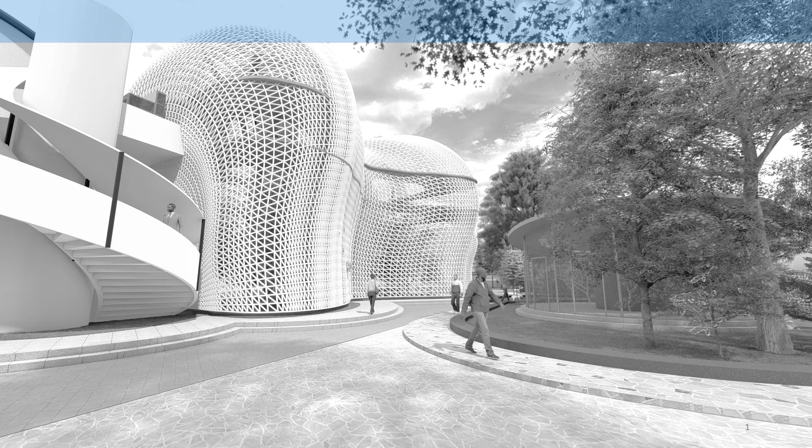Beginning with the introduction: why this topic? The process of urbanization is continuously depleting our cities of biodiversity. Humans consciously care about only humans and their foremost surroundings, neglecting a major part, that is, nature and animals. Hence, I feel there is a need for such a center which would give them five freedoms.

1. Freedom from hunger and thirst. 2. Freedom from discomfort. 3. Freedom from pain. 4. Freedom to express. 5. Freedom from fear and distress.

This center will be covering animal assisted activities, animal assisted happiness, and animal assisted therapy. The aim of the Welfare Center is to provide a roof, medical help to animals and birds, and to create a human animal bond. Biophilic architecture.

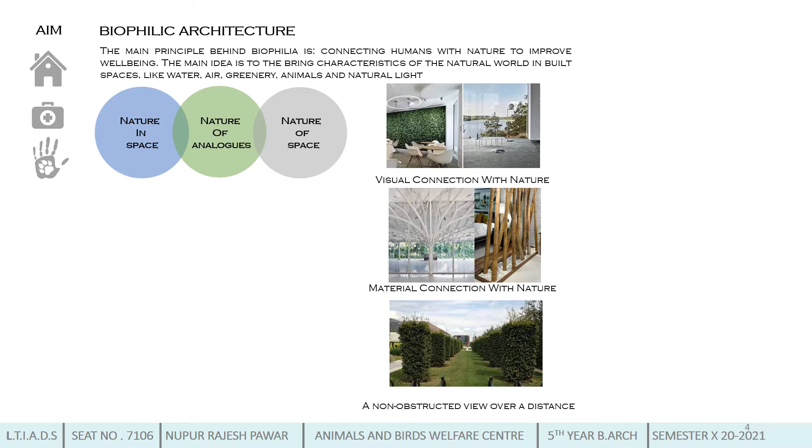The main principle behind biophilic architecture is connecting with nature to improve well being. I have tried to portray this in my center planning. Nature in space, nature of analogs, and nature of space should be linked together for creating biophilic architecture. The main aim is to increase the visual connection with nature, material connection with nature, and providing a non-obstructed view over a distance. Passive cooling techniques have been used by providing courtyards.

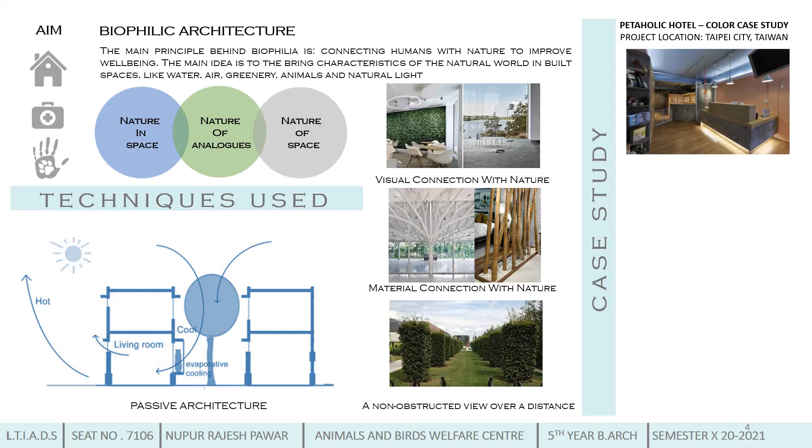Moving over to case studies. A petaholic hotel situated in Taiwan informs us about colors suitable for animal health. Next is People for Animals, which tells about materials. And the third is Palm Springs in US, California, which gives information about open versus built percentages of land.

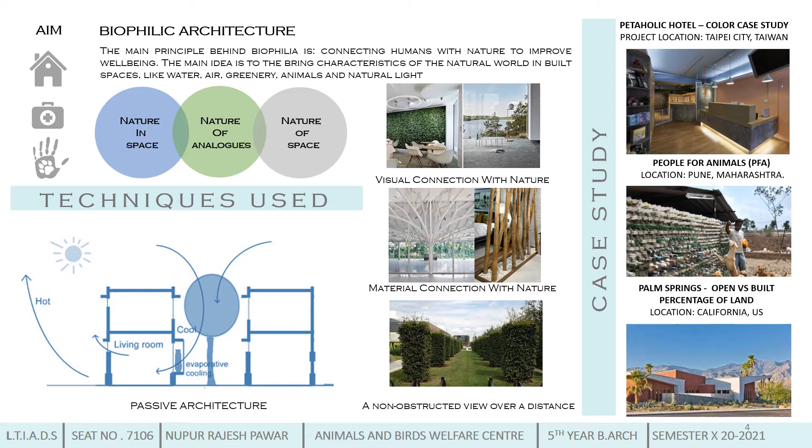Moving further on species of animals and birds that the center would be dealing with. As you can see, these are the various species of dogs, cats, and parrots of Indian and non-Indian breeds as well.

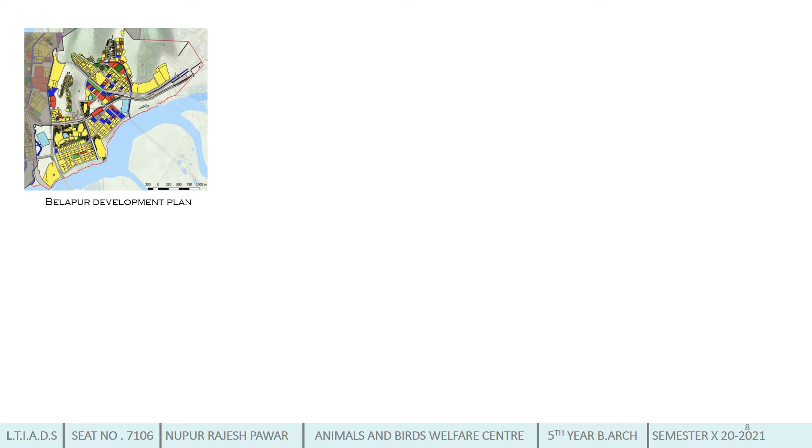Moving to the site study, my site lies in Belapur, a node of Navi Mumbai. The DP of Belapur is more towards residential sectors, and to be precise, it lies next to the Apollo Hospital. Belapur is well connected by two main roads. The climate of Belapur is mainly tropical.

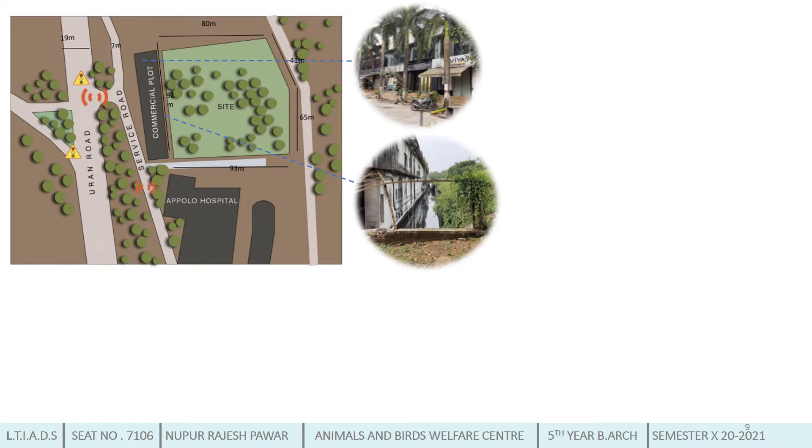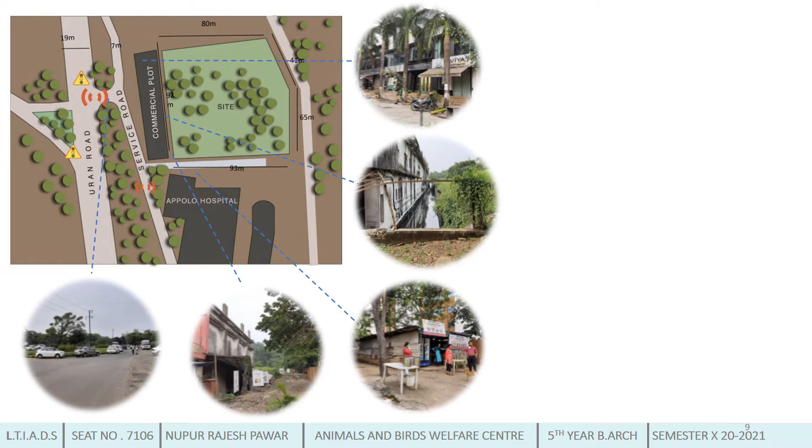The area of the site is 2.7 acres, and it is behind a commercial plot with a refreshment corner and a 4-meter wide Kacha road. Access to the site is from a 7-meter service road connected to the 19-meter wide main Uran road. The keywords of SWOT analysis are thick vegetation, a commercial plot as a buffer, hierarchy of roads, and minimal sunlight from the south.

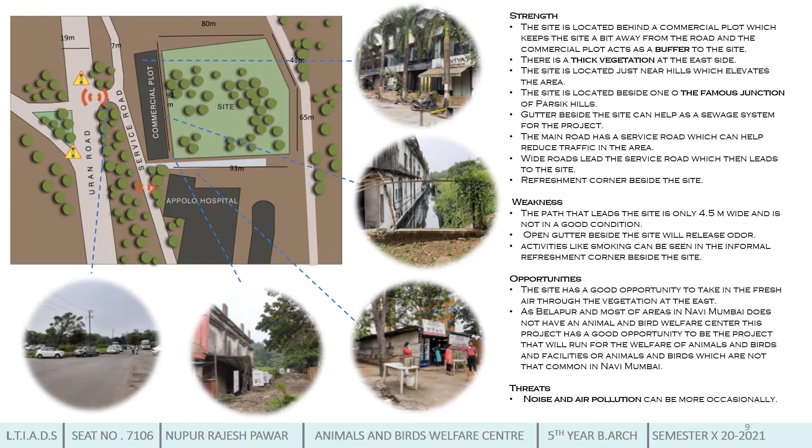Before beginning with zoning and concept, let me tell you that this center will be taking in dogs, cats, and parrots only, because these are the ones who are mostly abandoned and looked for when one wants a pet.

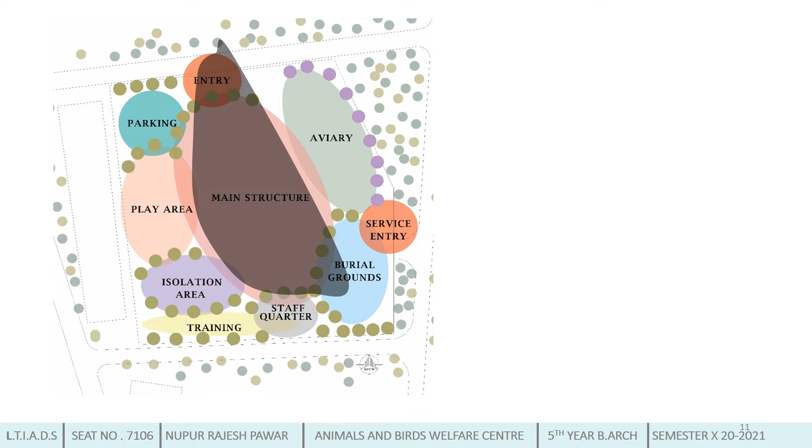Moving further to zoning and concept. The entry to the center is in between the main center and aviary so as to attract and create more awareness towards Psittacidae family, which is the parrot family. The main structure and the aviary are the two parts of the center, which resemble the two hemispheres of the human brain.

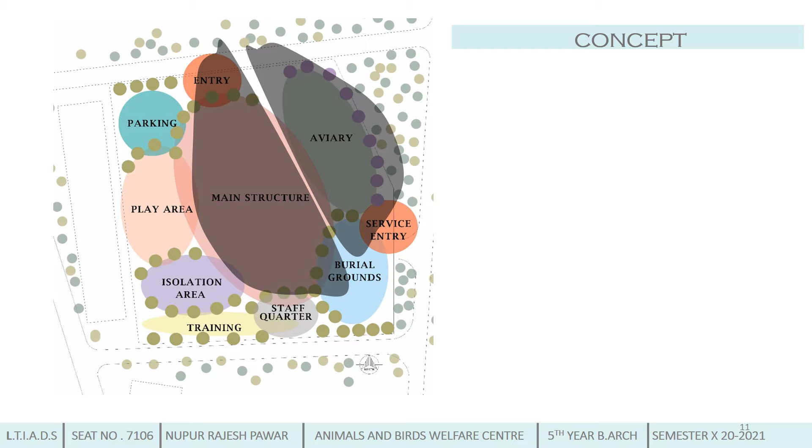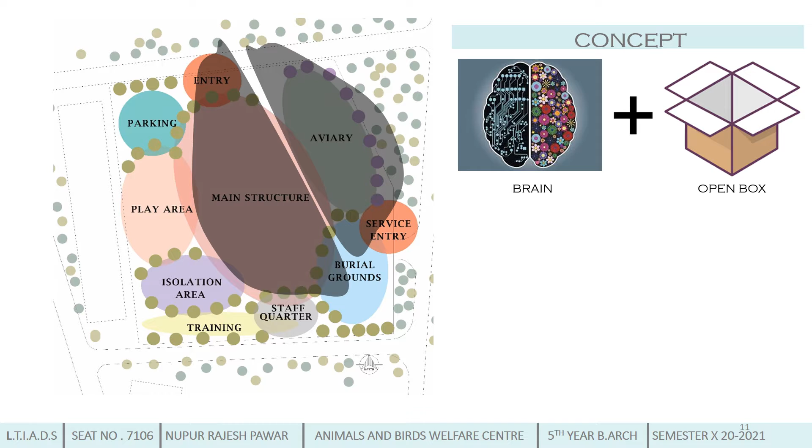The main structure, like the left hemisphere of the brain, is planned more technically, simple and apt for animals, whereas the aviary, which resembles the right hemisphere, is played with forms, as the right hemisphere is about creativity. In addition to this concept, I have tried to incorporate the open box concept, that is, openness in an enclosed space. The overall concept of the center is all about the phrase form follows function.

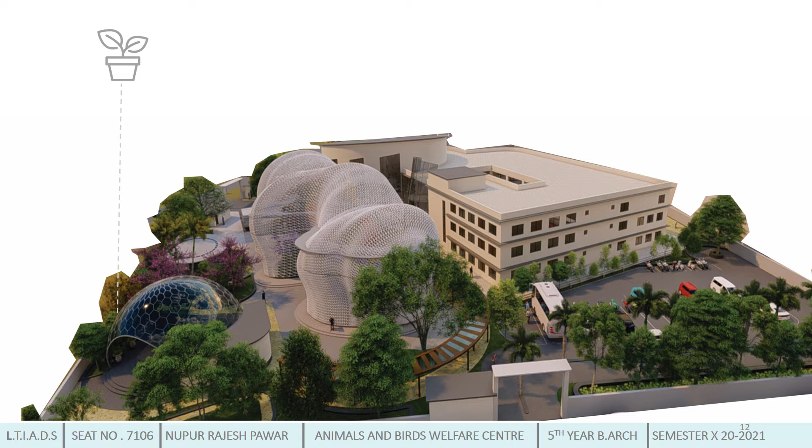The center includes a nursery, a wild bird cage area, a burial ground, an aviary, staff quarters, cafeteria, animal gym, kennels and catteries, isolation area, and a parking lot.

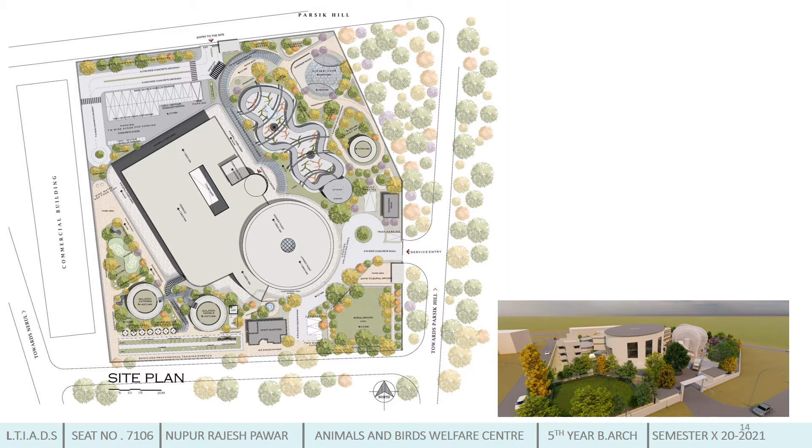Coming to the planning: site plan. The entry of the center is from the north and the service entry is on the east.

All the predominant winds flowing towards the site from the west are pretty much blocked by the commercial building, and hence, to purify the air, an air purification plantation stretch has been provided.

A nursery with species of both indoor and outdoor plants which are safe for animals and birds is planned. A run area for dogs and cats is also provided.

The bird cage area would be caging injured wild birds, freed after the medical treatment. There is also a dog training area provided.

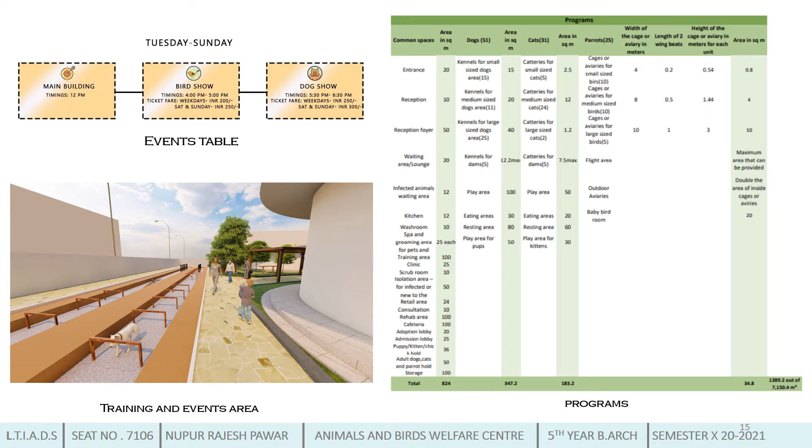I have prepared a chart showing the events in the center. This table shows the various crucial programs necessary for the welfare center.

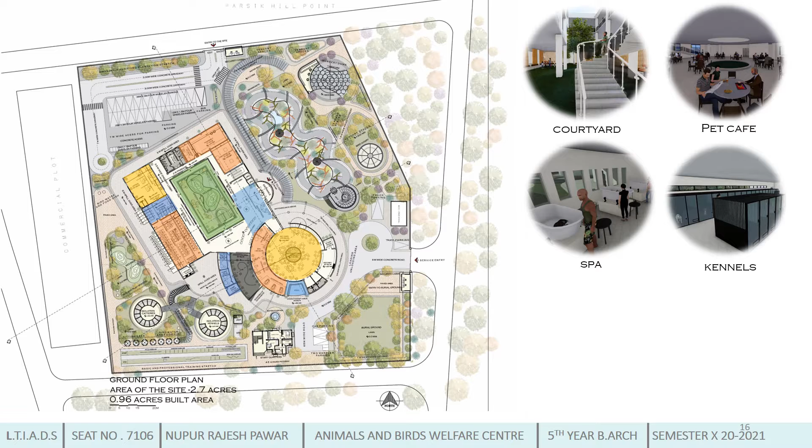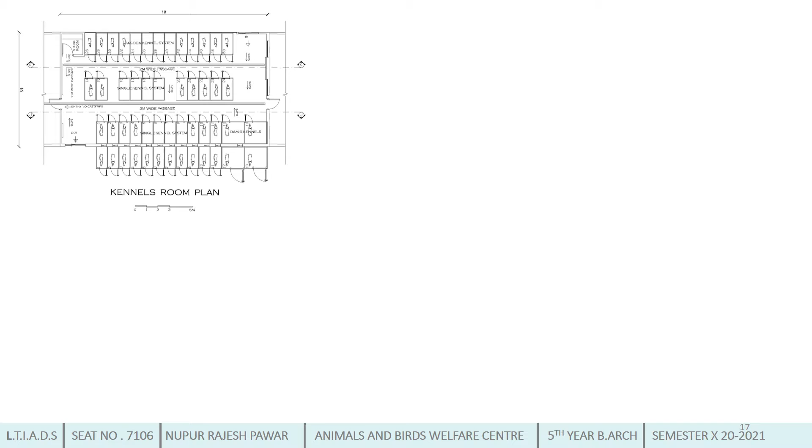Coming up is a blown up plan and section for kennels. It includes single and pagoda kennel systems for large size and small size dogs respectively. This is a typical arrangement of kennel.

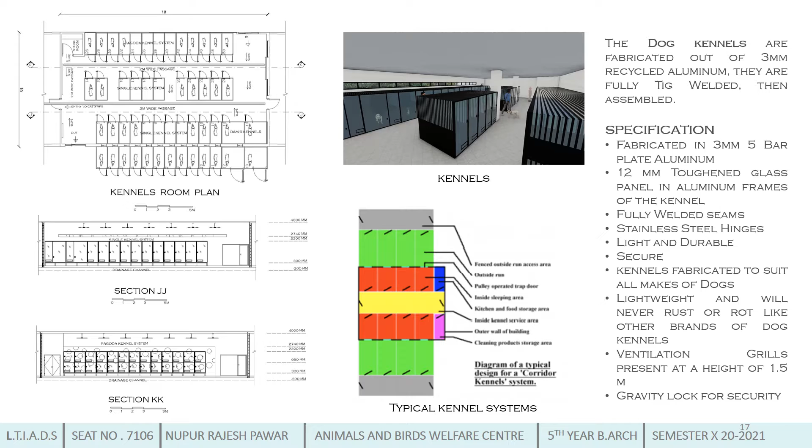These are the plans, sections and elevations of single and pagoda kennel systems. A wider kennel for dams, that is mother dogs along with their pups, is provided.

These are plans, sections and elevations of arrangement of catteries and single units of catteries.

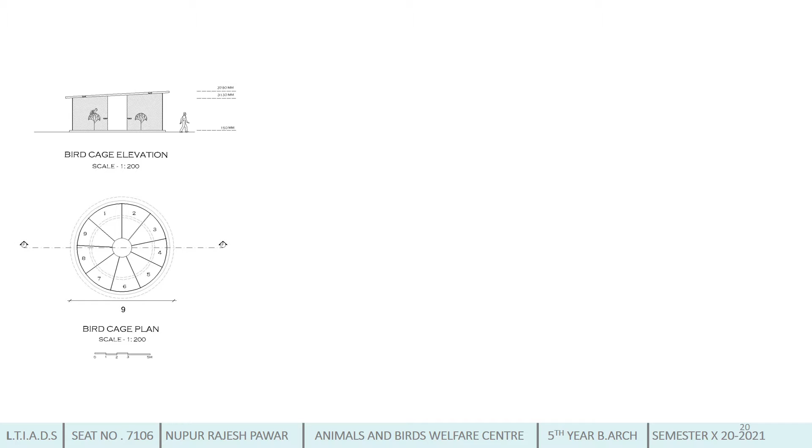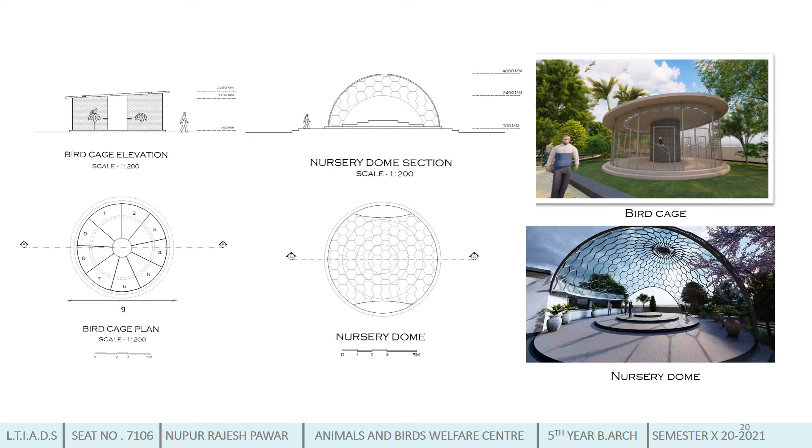Plan and elevation of a bird cage, which is made up of stainless steel mesh, and a plan and section of the nursery dome, which is made up of polycarbonate sheets, are also provided. These are the plan and section of isolation areas provided for dogs and cats.

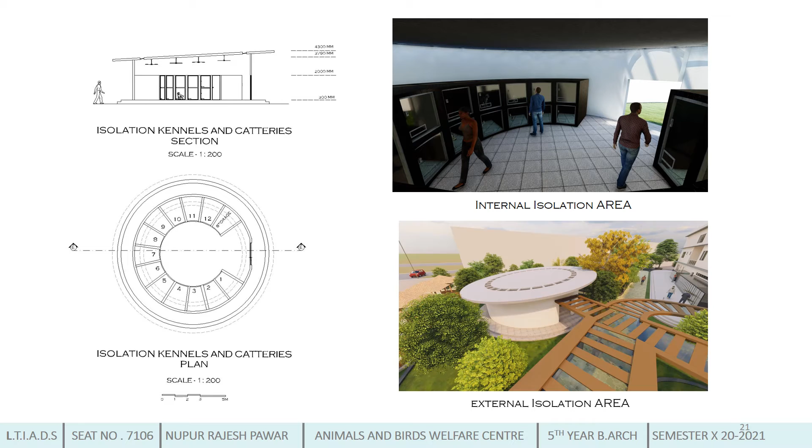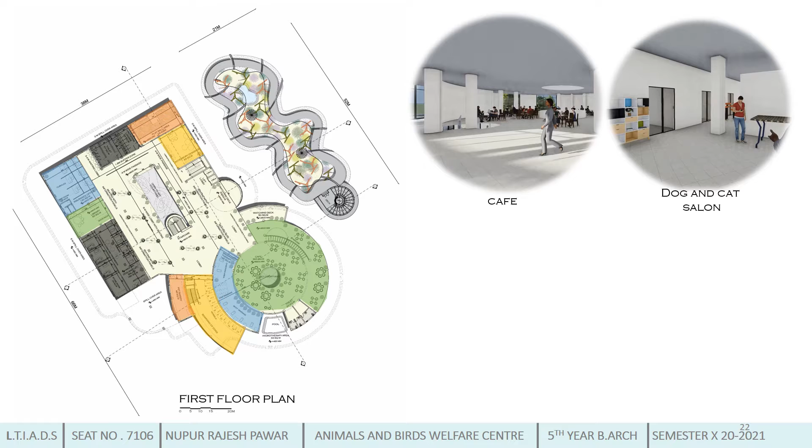Going further to the first floor plan: a normal cafe, a massage therapy area, dog boarding area, bakery for pets, dog and cat salon where fur dyeing and nail trimming will be done, a small library, an office, toilet block, play area, accessory design area, bird watching decks, and a huge lobby which covers the first floor.

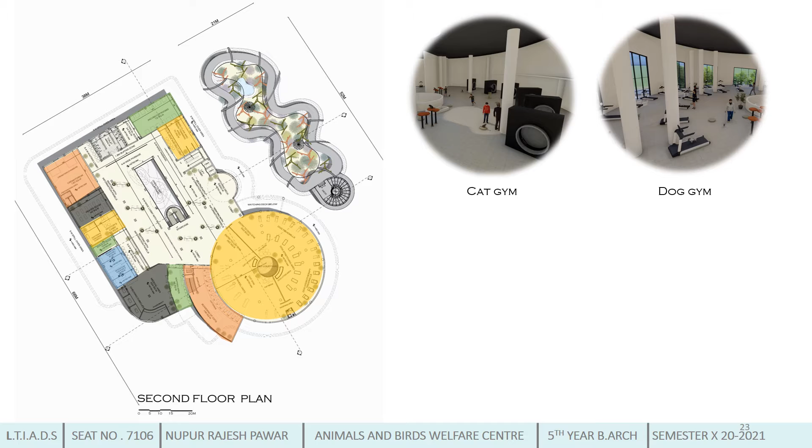The second floor consists of a cat and dog gym, cat boarding, a waiting area in the medical block, checking cubicles, operation theatres, scrub up rooms, and a doctor's room. Moreover, a crematorium with a prayer room, incubator room, bird claw and beak trimming area, and again a huge lobby which covers the central part of the plan.

These are some views from the second floor plan. All the rooms are planned with cross ventilation and enough sunlight, and a central lobby with courtyard which acts as a passive cooling technique of architecture.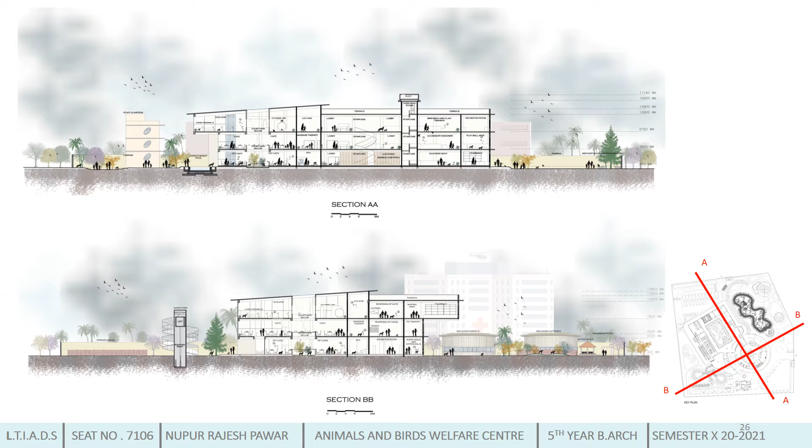Moving further to elevations. The northeast elevation is the front facade of the structure and the southwest elevation is the rear side of the structure. Wall decals have been painted all over for a fun touch to the structure.

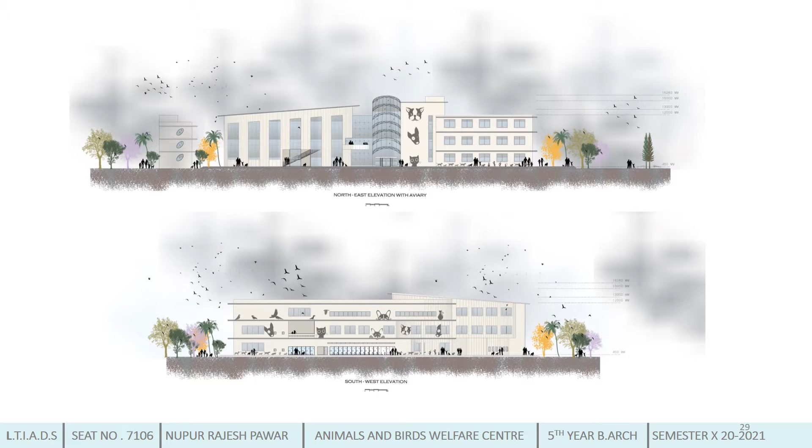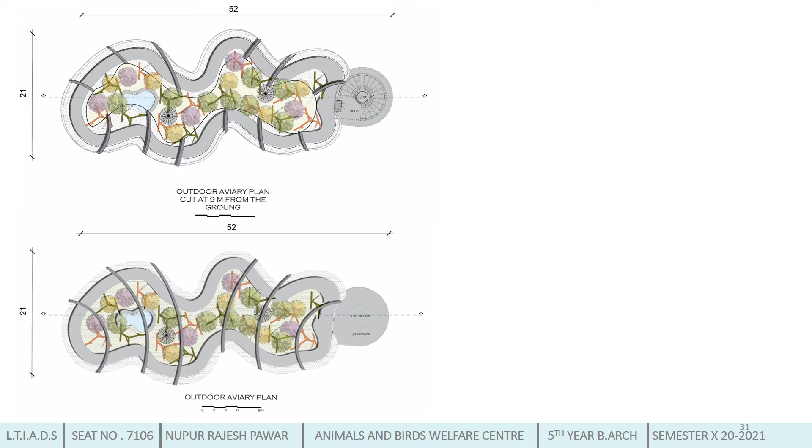Coming to the aviary. These are plans of aviaries and the above plan is cut at 9-meter height from the ground. These are the internal as well as external views of the aviary.

The aviary has a spiral staircase, a lift for handicapped, and a bridge which runs along the periphery of the aviary. The form has been played with, and the tree-like steel columns with artificial cavity nests bring in a natural touch to the aviary. The main mesh is made up of stainless steel.

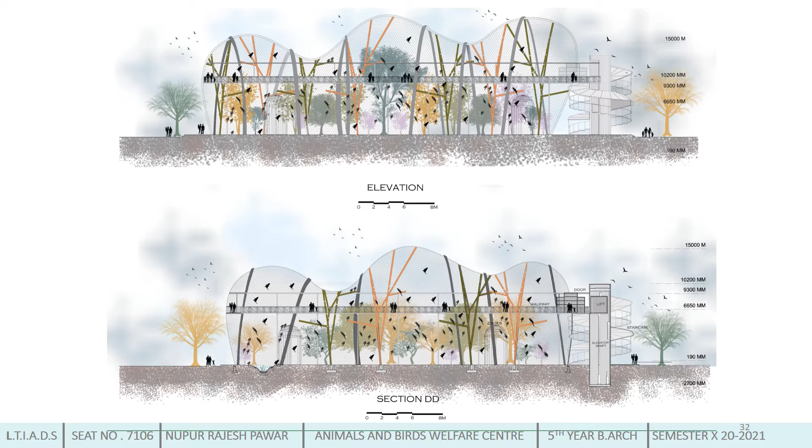According to the study of species of parrots which are mostly sold and adopted in Mumbai and Navi Mumbai, these are conures, lorikeets, grey parrots, and macaws.

Moving further to the views. The views are all from different areas and angles, showing the entrance, north side of the structure, the rear side of the structure, and the south side of the structure.

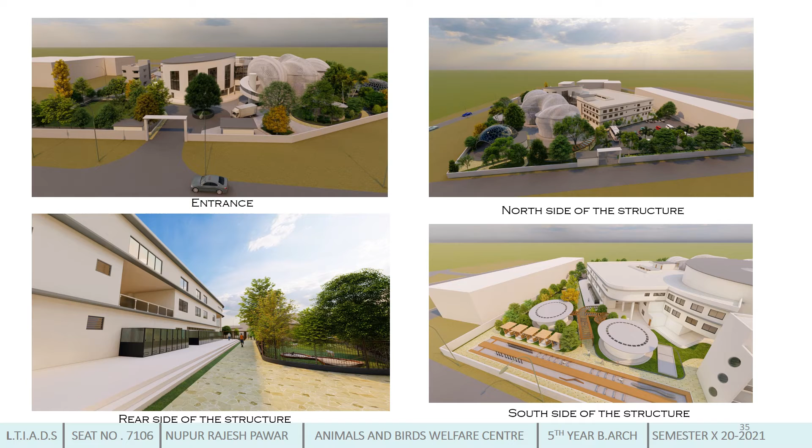Now going to the details. The material used for construction of the center is hollow concrete blocks, and this is a key section of the outer walls which is 230 mm thick.

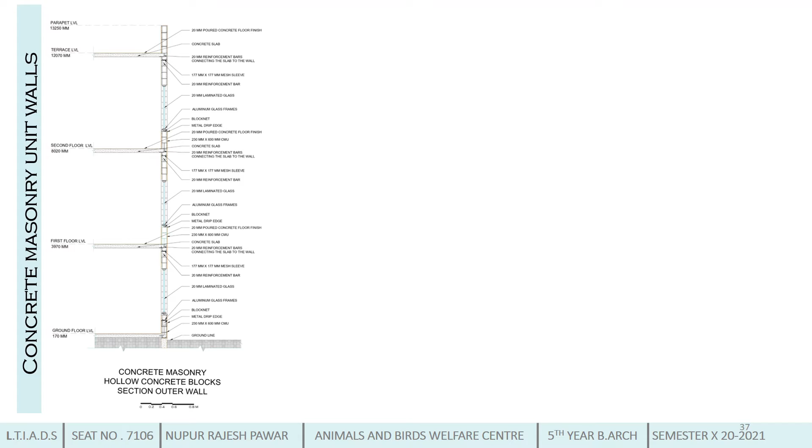Next is the key section of the same for inner walls. Next shows the connection of concrete slab to the hollow concrete blocks, which is connected with 20 mm reinforcement bars. These blocks have been used overall in the structure.

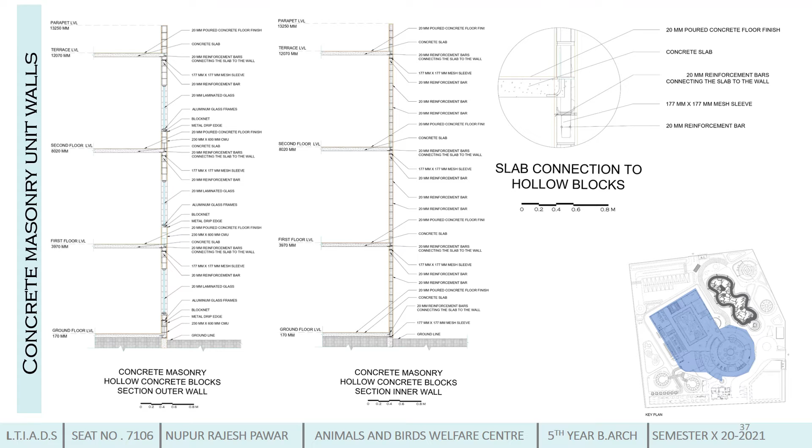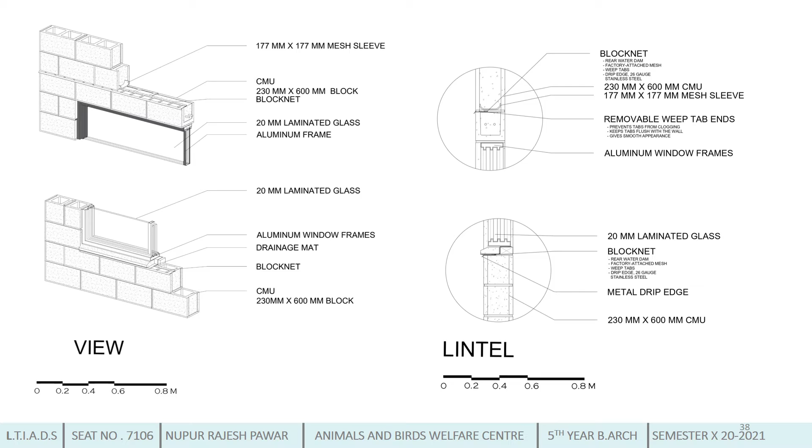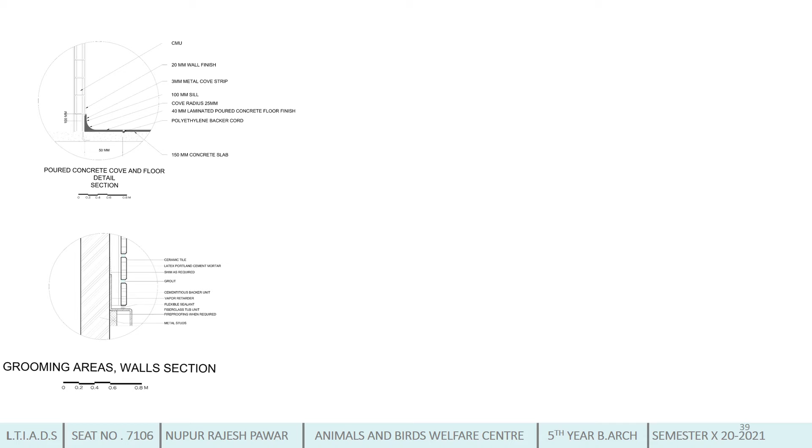All the grooming areas would be having ceramic tile cladding with latex Portland cement mortar so as to prevent the seepage of water. Next comes a detail of glass partition which connects to the poured concrete floor and connects to the second glass panel.

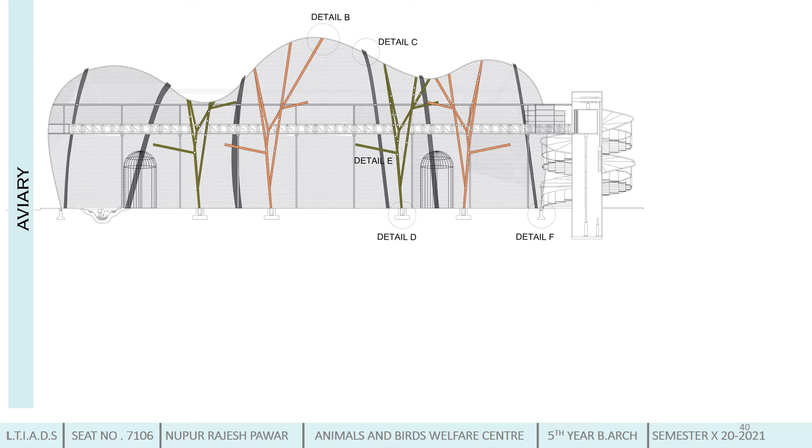The aviary detail covers the foundation layout, connection of stainless steel mesh to the ground, and a detail of nut, bolt and base plate used in the construction of the aviary.

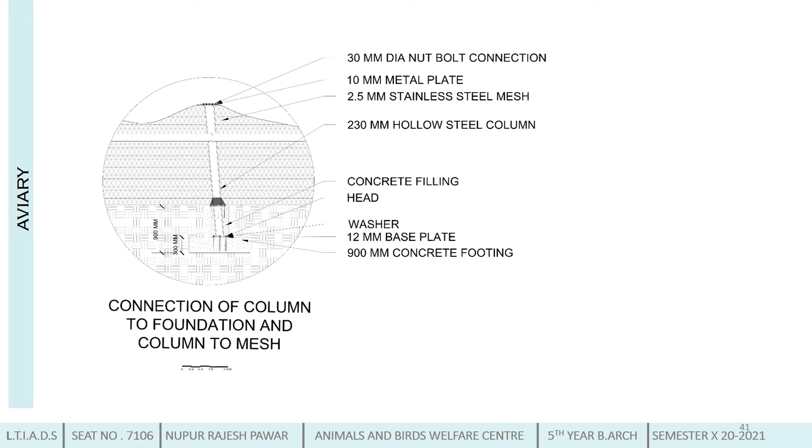This is a connection of hollow steel column to the stainless steel mesh and column to the ground and the foundation with the help of nut bolts and base plate.

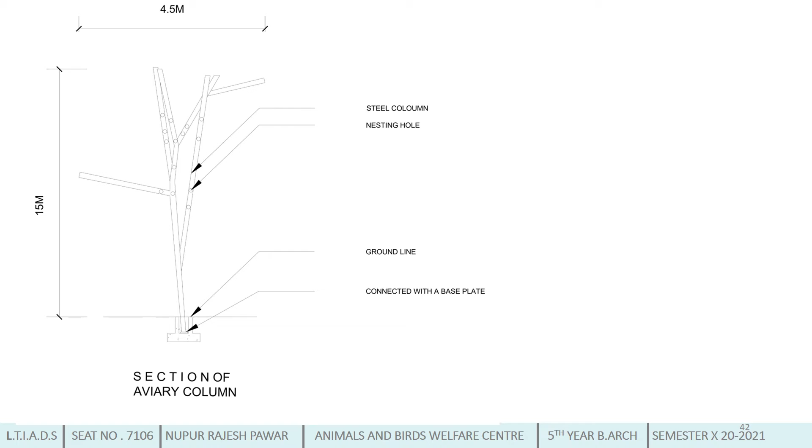A blown up detail of column to foundation is also shown, which connects to the foundation with anchor bolts, base plates and stiffener plates.

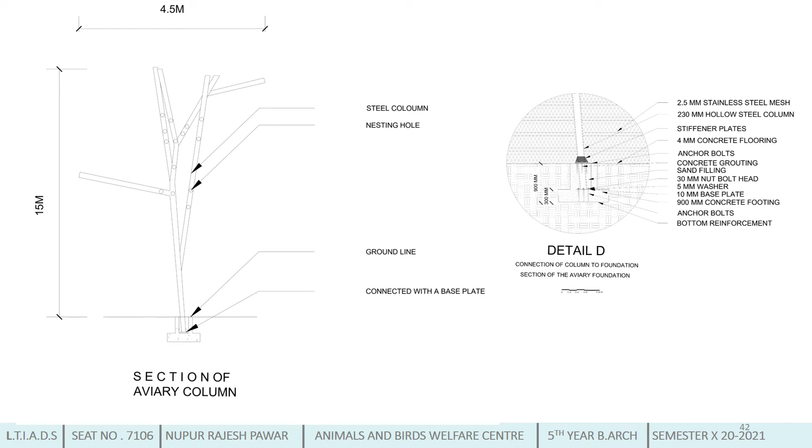This blown up detail shows how the column connects to the stainless steel mesh. The next detail shows how the hollow aluminium tubes, which are the supports of the mesh, are connected to it.

This is a single pad footing with base reinforcement of 20 mm bars.

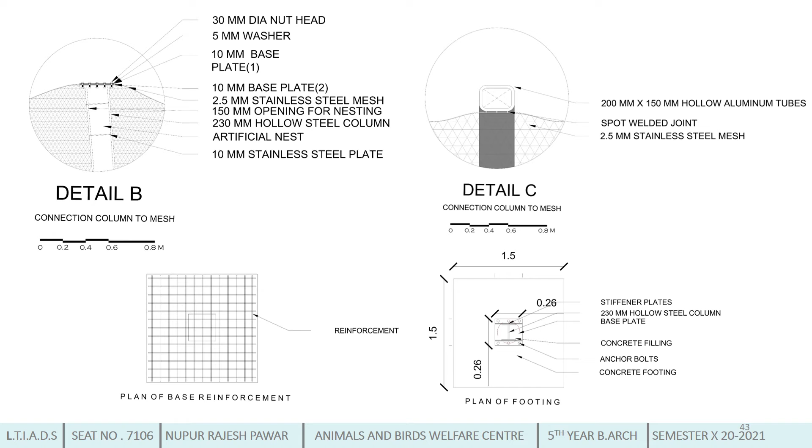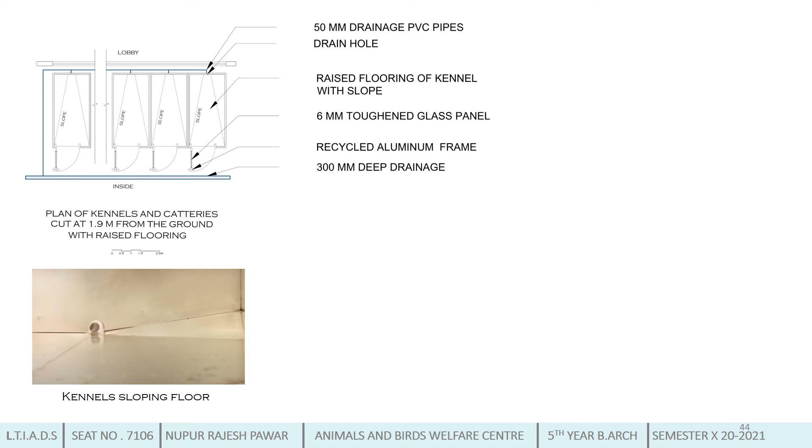The drainage system of kennels and catteries is explained in this detail. It has a sloping floor with an outlet at the back of the kennel which is connected to a PVC drainage pipe, which leads to a 300 mm deep drainage line.

This detail is of glass partitions within gypsum board panels. The next detail is a blown up of the gypsum board connection to the concrete slab, and a detail of light fixture and false ceiling with the gypsum board.

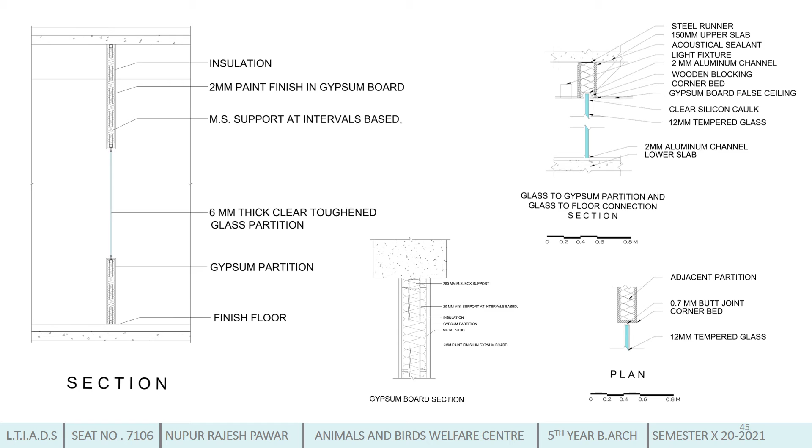These partitions are used wherever sound insulation is needed, like kennels and catteries. Two-way spider connectors are used for connecting glass panels used on the front facade to maintain a visible connection to the outside nature.

This is a detail of a single spider connector. Green roof system has been used for the isolation areas for keeping these areas comparatively cool. This is a truss used for the glass cylinder watching deck.

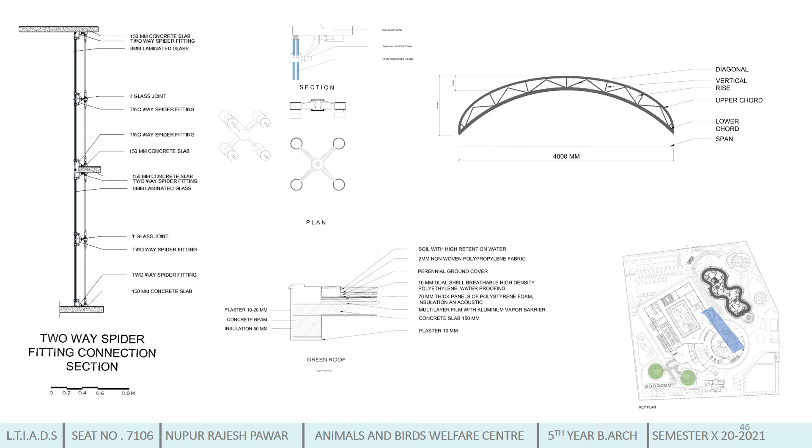Detail of mullions shown, which is again used for keeping visibility from the circular part of the plan. This is a blown up detail of the connection between two glass panels.

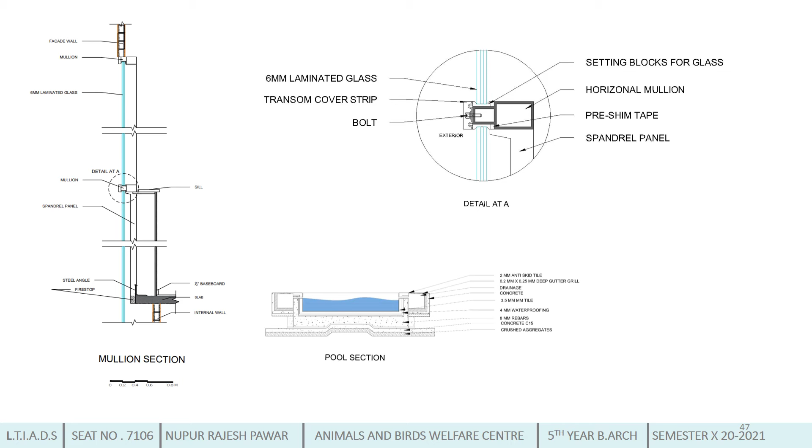The hydrotherapy area has a small pool and a detail is shown here. Drainage line is connected to the toilet block, kennels, catteries, aviaries, nursery domes, bird cage, staff quarters, and then to the tank.

This escape route plan shows the green arrows as primary escape routes and the red arrows as the secondary escape routes.

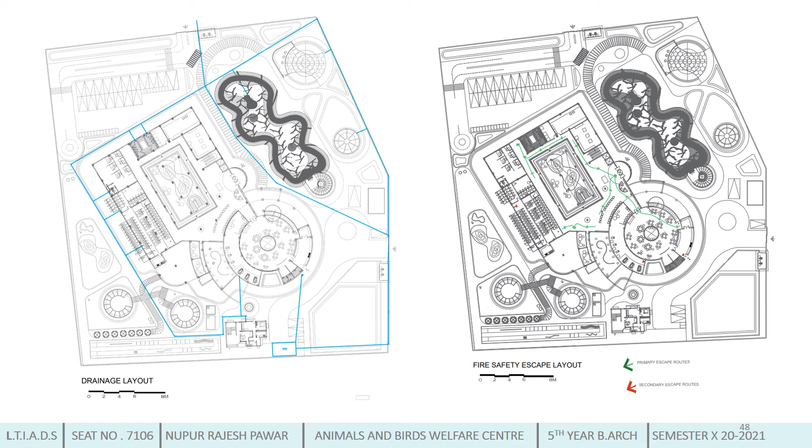These are the water calculations and accordingly plan and section of the UGT needed.

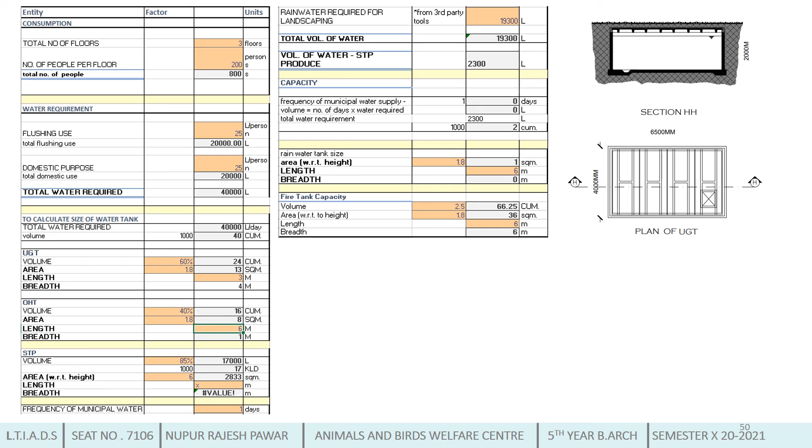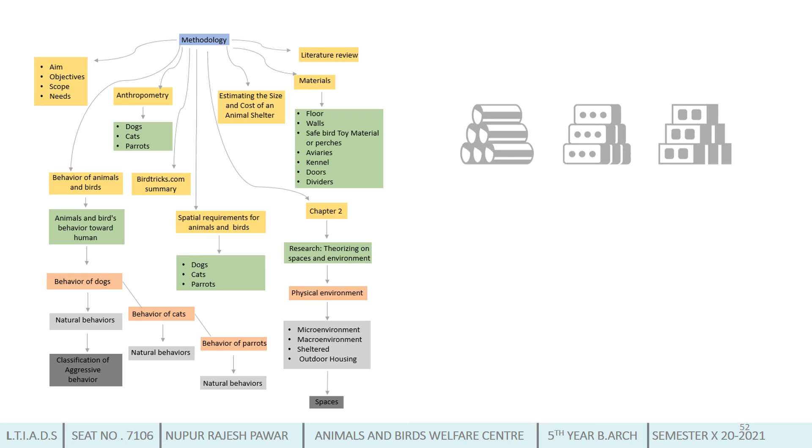Moving to the elective study. I have inculcated study of materials, anthropometry, planning requirement, the environment needed for animals, and aspects like behavior of the animals and birds.

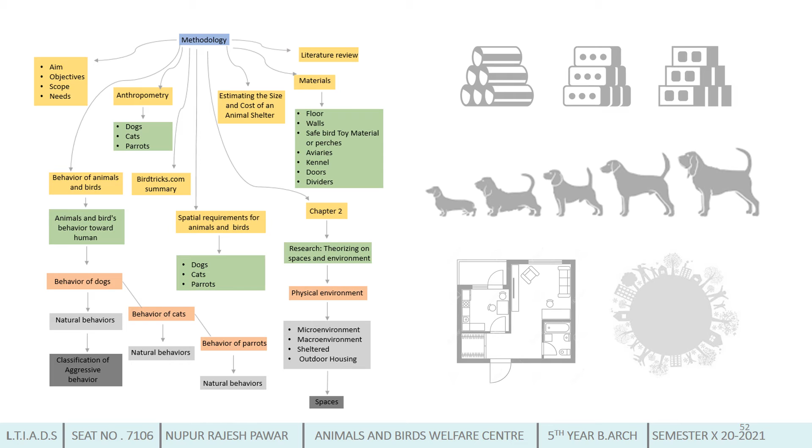Further, we will move on to the walkthrough, which will give you an idea of the overall planning and make you experience the positive aura of the center.